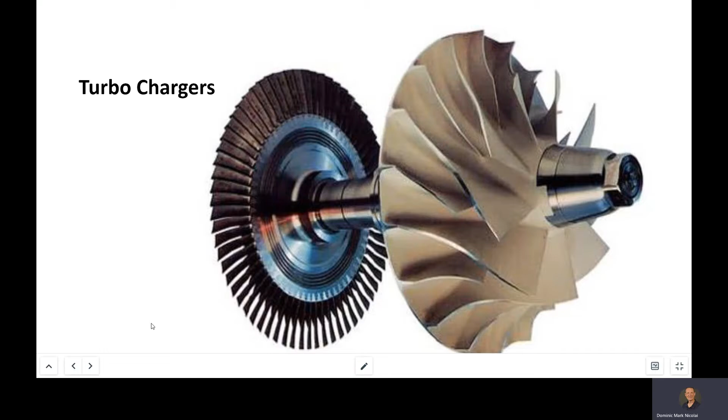We're going to start off with turbochargers. Turbocharger, very nice way to get more power out of the engine. When you think about the Cirrus or the Seminole, I'm flying a normally aspirated engine. So at sea level, I have the most power I'm going to get out of a naturally aspirated engine, given a standard day.

And as soon as I start climbing, I immediately have fewer air molecules. And if I keep climbing, I keep having less and less air molecules. So the performance of my engine is degrading as I go up. You can see that in your Cirrus performance chart for the climb, and you can see how you have a lesser rate of climb as you go up.

Now the turbocharged engine has the ability to pack air molecules together and maintain that 100% rated power. So we start off at sea level at 100% rated power, and for a while we just maintain that. Now the turbocharger effect will degrade when you get high enough.

We used to fly the Piper Seneca, and it had 225 horsepower engines. They were turbocharged. They were wonderful. We would fly those airplanes, some days doing maneuvers at 10,000 feet with students. We wanted to get above the clouds, so we did that, been up there a couple times doing that. It was wonderful, because of the turbocharger and because it had the ability to maintain its rated output, we could actually do single engine go-arounds and single engine missed approach procedures, and go do a single engine hold.

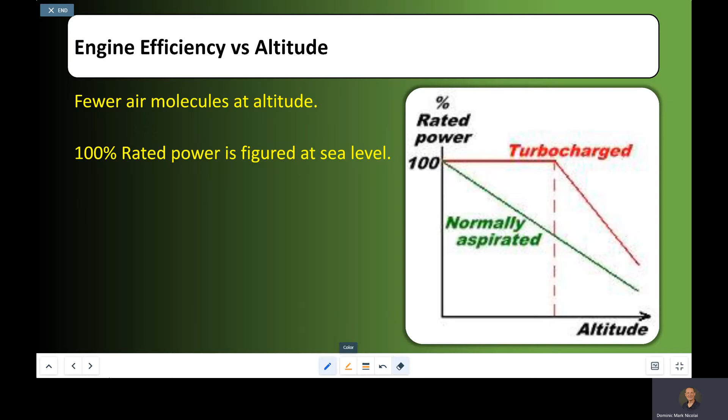All right, let's take a peek here at a couple different critters, because turbocharging comes in a couple different flavors. The first one is a turbo normalized situation. That would be an example if you were to look at the Cirrus SR22 turbo model. They have normalized the turbocharger system, which means they're going to maintain sea level pressure up to high altitudes.

Now we think about sea level pressure as 29.92 inches, but we could just round that up to 30 inches of manifold pressure. So we're maintaining 30 inches all the way up to a certain predetermined altitude. After that altitude, if we go higher, we'll have a decrease in manifold pressure. That SR22 turbo model can go all the way up to 25,000 feet, which is its rated altitude, its maximum altitude, and it can maintain 30 inches all the way up. It can probably maintain 30 inches higher, but the airplane's not certified to go higher than 25,000 feet.

So that's pretty good. The other one is turbo supercharging. When we talk about supercharging, we're going to boost the pressure beyond sea level, so beyond 30 inches. Our Piper Seneca was 42 inches of maximum boost, normal was 40 for it. We had a couple inches of overboost capability with it. So that was nice, and we could hold 40 inches all the way up to 14,000 feet. That's a pretty good deal out of it.

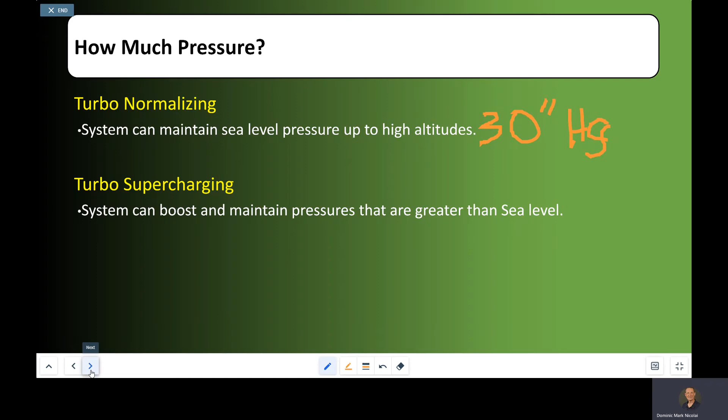Oh, and just a note, we talk about supercharging in an airplane. If you're familiar with a car supercharger, which is belt driven, we're not talking about that type of setup here in an airplane engine. Everything is going to be exhaust driven, whether it's a normalized system or supercharged system.

So just a real quick video here on the operation, kind of giving you an idea of the inflow and outflow of a turbocharger.

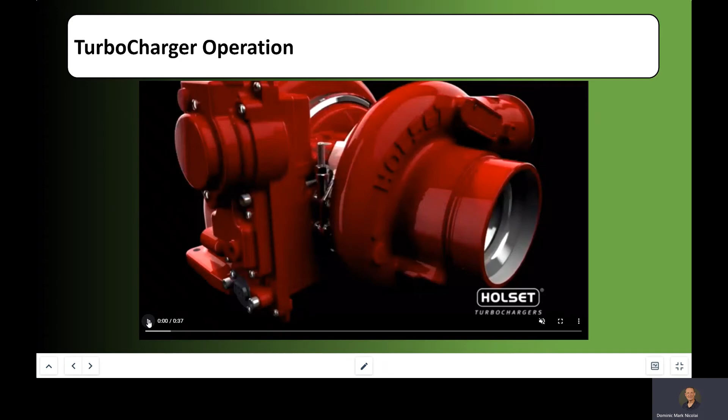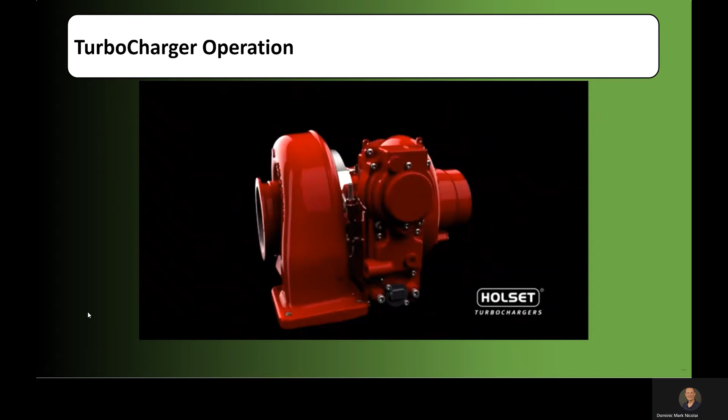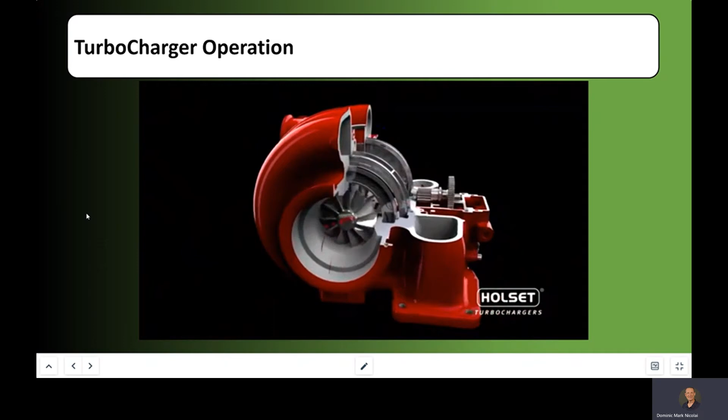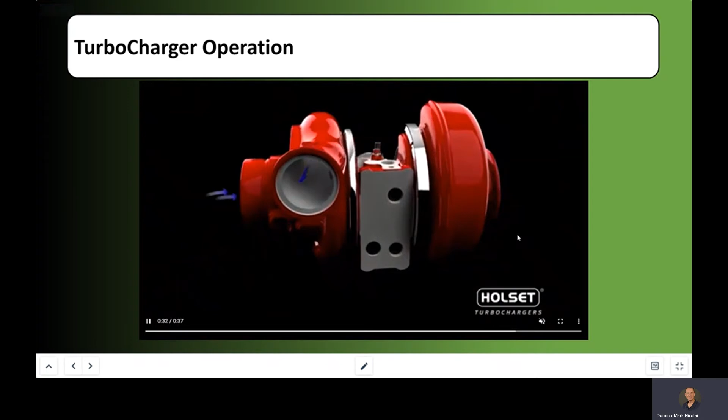What we do is we have air come in to the turbocharger, and then it hits the compressor and gets compressed. Now this red is going to be the hot exhaust gas that's turning the turbine blades, and connected to the turbine blades is the compressor section. This is where the air, the blue, is being compressed, and then that's going out into your engine. So everything's exhaust driven on this airplane.

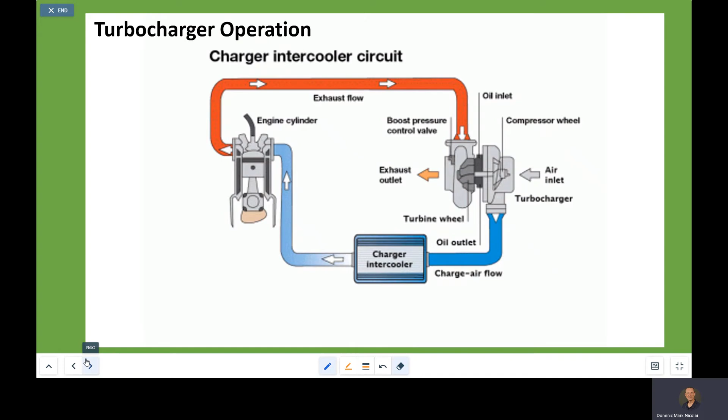Located in the system, it's not drawn here, but there will be a butterfly valve connected to your throttle. And there's one other part, but we're going to talk about that on the next slide here. Let me put this in motion and show you what's happening.

As air comes in to the system, it's going right through the compressor, and compressed air is going right into the cylinder. That extra compressed air gets mixed with a little bit more fuel, and it increases the output of the engine. So we get more power, you get more exhaust. More exhaust is going to go through that turbine, and it's going to cause that turbine to spin a little bit faster. And then that faster spinning turbine is going to compress a little bit more air, and that more compressed air is going to go into the cylinder, and that's going to cause more fuel to be mixed with it, more power, and more exhaust.

That more exhaust is going to go over the turbine blade and spin it faster. It's directly connected to the compressor, so it's going to spin the compressor faster, and that's going to compress more air into the cylinder, with more fuel added. So you're going to get more power, more exhaust, and more exhaust over the turbine, spinning it faster, which spins the compressor faster, bringing more compressed air into the cylinder, mixed with more fuel, more power, more exhaust—and it just keeps going on until it reaches an equilibrium point.

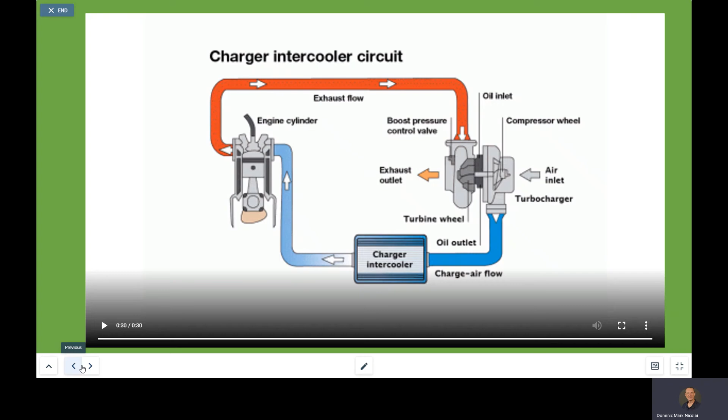We got to throw in another part to it here, and that's called the waste gate. Over here on the exhaust side, the red side, our exhaust is coming in. And the main flow is over the turbine blade, but there's also this secondary pathway to bypass the turbine. And that's what the waste gate is—it's kind of wasting the exhaust gas and bypassing the turbine with it.

So let's think for a moment. When we're on the ground at sea level, I don't need a lot of turbocharger effect at this moment here. So I'm going to have the waste gate completely open down here at sea level.

Enter a climb—take off, enter the climb. You're going up in altitude. You have fewer air molecules coming in over here to the compressor. So what we need to do is actually redirect more exhaust gas over the turbine and spin the compressor faster as we climb up. So we start closing the waste gate here to direct more exhaust gas over the turbine, which spins it faster, which allows it to draw in more air and compress it together to still get the needed amount of air to maintain your power setting.

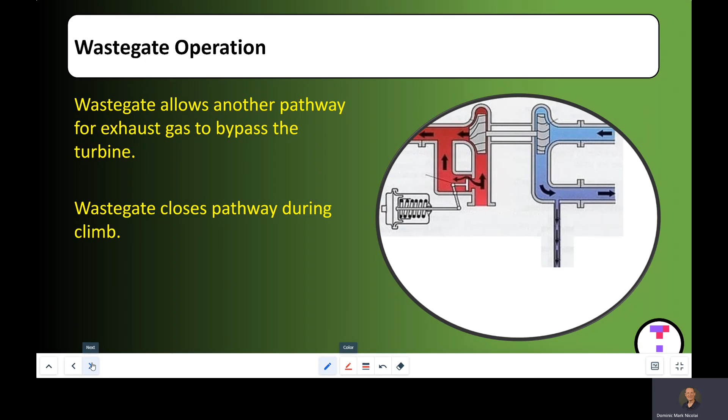All right, don't read more into this question than what's there. What directly spins the turbine on a turbocharger? What causes that turbine to spin? Don't read more into it than what's there.

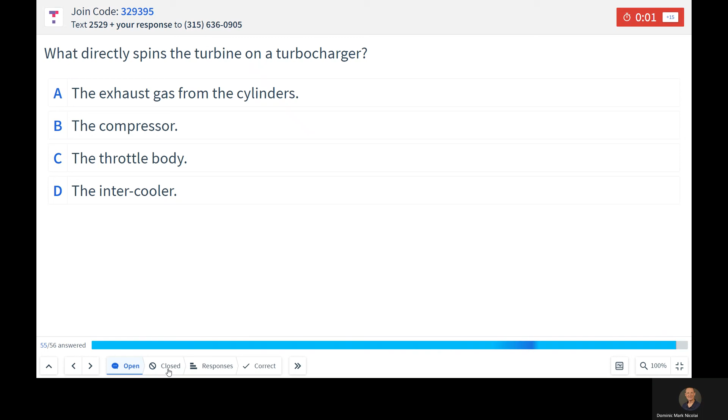Most of you got that one. All right, the exhaust gas spins the turbine. That's right, directly spins it. Nothing else spins the turbine.

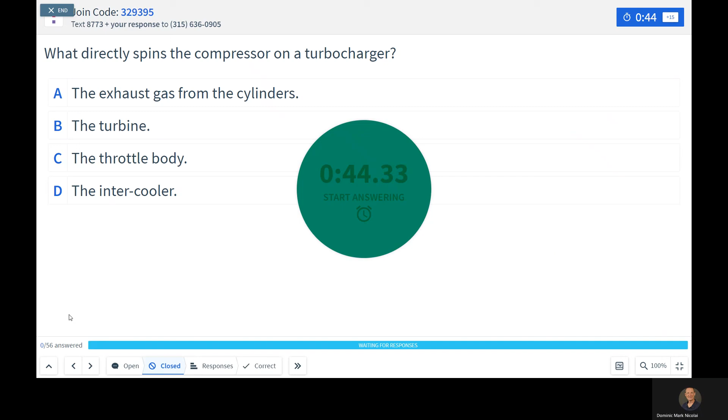Try another one here. Again, don't read more into this question than what's there. What directly spins the compressor? What directly spins the compressor, though?

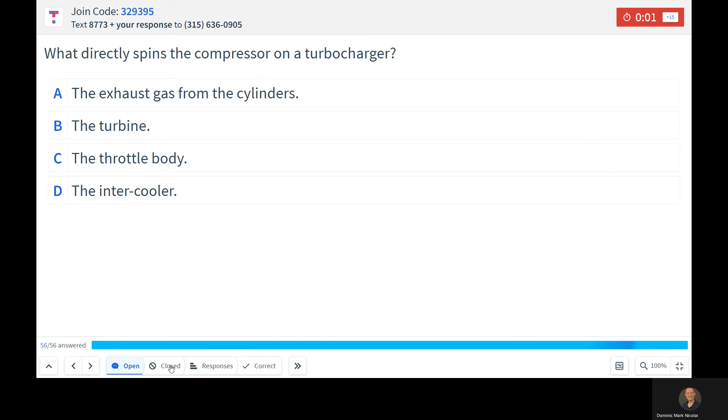Oh wow, okay, most of you got that one right. It is the turbine—they're connected together. Whatever speed the turbine spins, the compressor spins. Exhaust gas spins the turbine, spins the compressor.